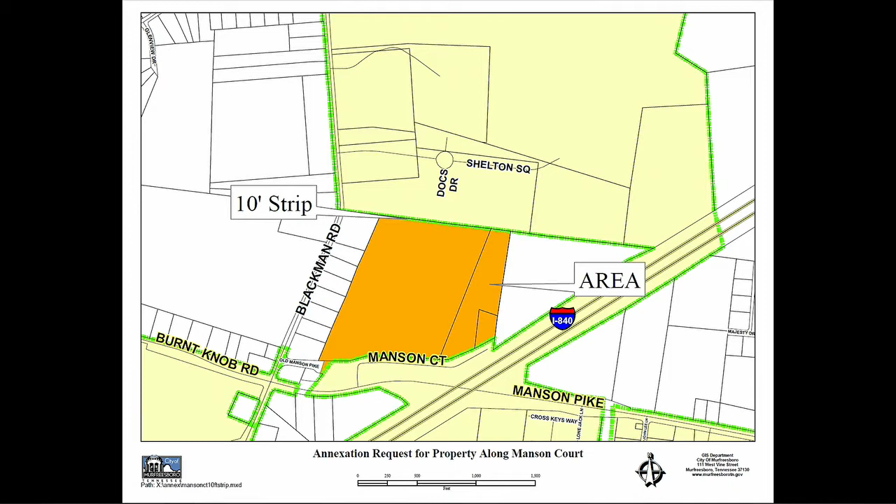So in the past, we have taken a similar approach, and we're proposing with this annexation, if you decide to move forward with it, that you condition it, and it should be written this way in the plan of services, either that the homes need to install fire hydrants per the fire department's location requirements, and make improvements to the driveway, making them wider or a hard dustless surface, and prune the vegetation that has overgrown the drives, or that those houses no longer be inhabited, and if people aren't there, there's nobody to make a call.

And so the way we would do that is we would postpone second reading at City Council until the property transfers from ownership of these three separate individuals to the developer who has a contract to purchase it. After the developer becomes the owner, then they can, of course, get rid of the homes, and then we can proceed with second reading. I reached out to Mr. Taylor and Mr. Mulchin, who represent the developer, and they said that the developer is comfortable with that approach. So I think we can cover our bases either way.

If you have any questions about the plan of services, I'd be glad to answer them for you. Otherwise, you should conduct a public hearing regarding the annexation. After this, I'll give you another presentation regarding the zoning. Okay. Any questions of the staff? Did you say the developer does not have a talk? Yeah, they will with the zoning, but not with the annexation.

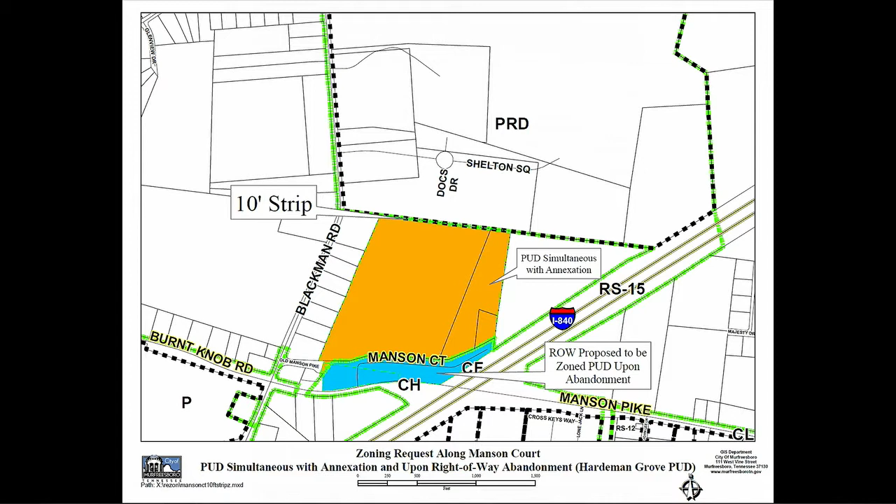They are small lots, with the smallest lot being 5,500 square feet. But the way we're calculating lot size here is on the lot width, so you can see in the plan that there are 3 different lot widths. And the homes are primarily masonry products, either brick, stone, or rock, and of course vinyl is allowed for details. The only exception to the similar type zoning is to the width of the property, and they're proposing to allow a 15-foot setback to the house, but the garage will maintain that 35-foot setback so that you can park 4 cars in the driveway, which is something that's been important to us when considering development plans.

They're also proposing to do a little bit wider of a right-of-way. I did include some information regarding the future land use map, which the Planning Commission has adopted. And you can see the future land use map identifies this area as business park.

And business park is a type of use, because it's a land use map, that would allow like office type development. Sometimes when you think business park, you think industrial developments, but in our land use map, that's not the type of use they're talking about. So they're talking about office parks. So of course, residential use isn't quite consistent with business park, neither is the commercial use, although maybe it's a little bit more, because the commercial use can provide neighborhood uses.

I'm going to invite Mr. Rob Mulchin to the lectern at this time to go through the details of the plan. If you have questions from either of us, we'll be glad to answer them. I did lay a letter out on your desk from somebody who was unable to attend the public hearing, so I told him I'd lay it in your desk. If you have any questions, I'd be glad to answer them.

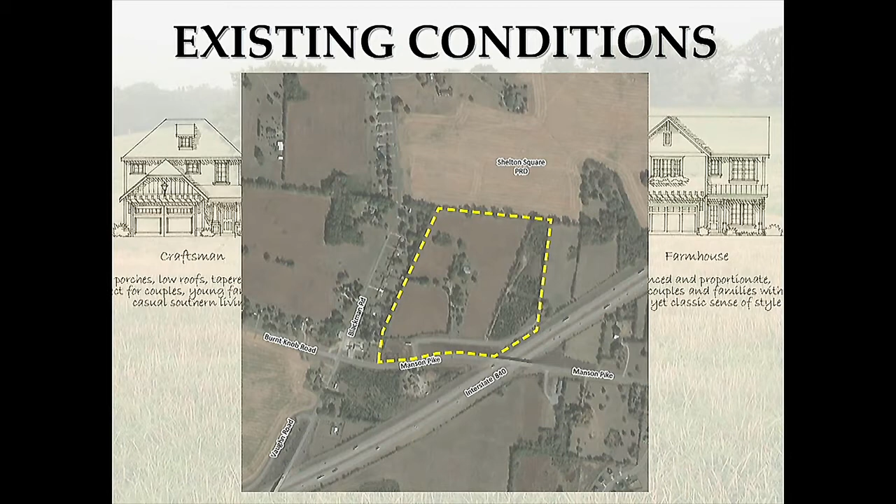Zoning: the property is currently zoned RM, or medium density residential, in the county. As you can see, there are a number of properties to the east and west that are also zoned as county properties at this time. To the north is the PRD, which is part of the Shelton Square project that you approved last year. To the south, you have some neighborhood commercial parcels that are part of the county zoning on that side. So you get some connectivity, and you also have some commercial elements in and around that intersection.

Then off to the southwest, you have the brand new city park that was recently approved a few months back on that side. As Margaret Ann alluded to, for the 2035 land use plan, the current request is for a business park type use. We have deviated from this in regards to the amount of newly proposed residential developments that are in and around this area. We feel it's a much better use in regards to the existing uses that are out there.

And as Margaret Ann alluded to, a portion of this development, roughly about 2.5 acres, is going to be a commercial element along Manson Pike. So we feel that we are kind of supplying a little bit of that business type character and more of a commercial element on that side. So we're kind of giving a dual use with this project.

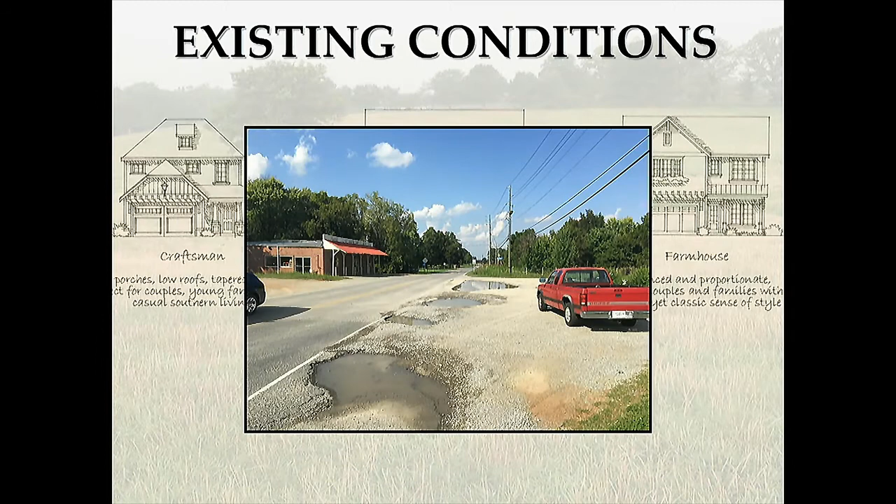This is looking back over towards the overpass going over Interstate 840. Again, this is a view actually looking the other direction back towards Blackman Road. This is the existing Blackman Station. As I had talked about, this is one of the properties that was zoned commercial neighborhood in the county. This is the little gas station service area in the northeast corner of Blackman Road and Manson Pike. And this is looking south along Blackman Road from that intersection as well.

This is one of the existing homes along Blackman Road that backs up to the property. You can see a one-story ranch style home that's indicative of the other properties there along Blackman Road.

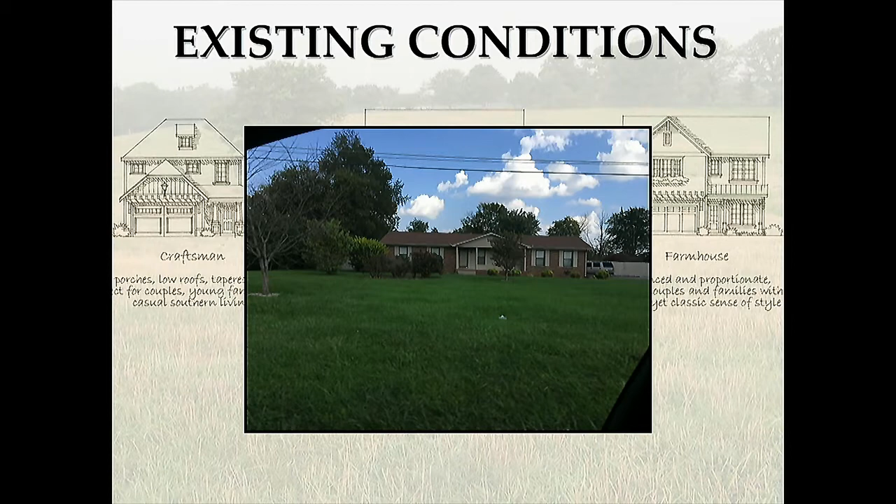We're asking for a planned unit district zoning on this. We're looking at roughly about 40 acres overall. As I said, about 2.5 acres of this overall project is going to be dedicated to commercial, 2 commercial lots at the entrance to the development. I'll talk a little bit about that here in a little bit.

The actual project is going to be all public streets within the development, with sidewalks on both sides, so a very walkable community for the residents, and also connectivity back to the commercial lots and also Manson Pike. And all utilities will be underground.

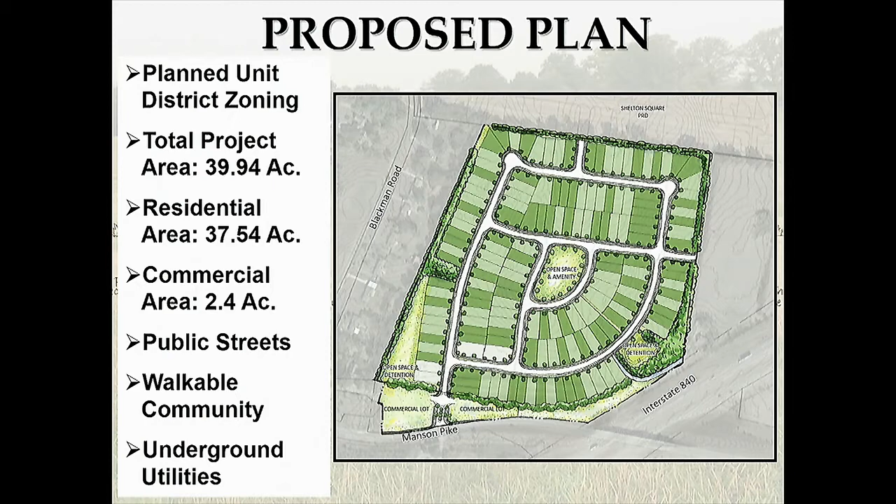Looking at 160 single-family detached dwelling units. So you're looking at roughly about 4.36 dwelling units per acre with this development. We're looking at a little more than 5 acres of open space on this. As Margaret talked about, we'll be looking at 3 different unit styles.

This is a very similar project. Our client, Crescent Homes, brought forward Kingsbury last year. They've now found another property where they want to incorporate this product style, home style and development style.

Looking at a 41-foot minimum width lot. You have a 46-foot wide and a 51-foot wide lot on those. So the minimum lot size in that 41 is roughly about 5,500 square feet. And we'll also have a neighborhood HOA to go along with that.

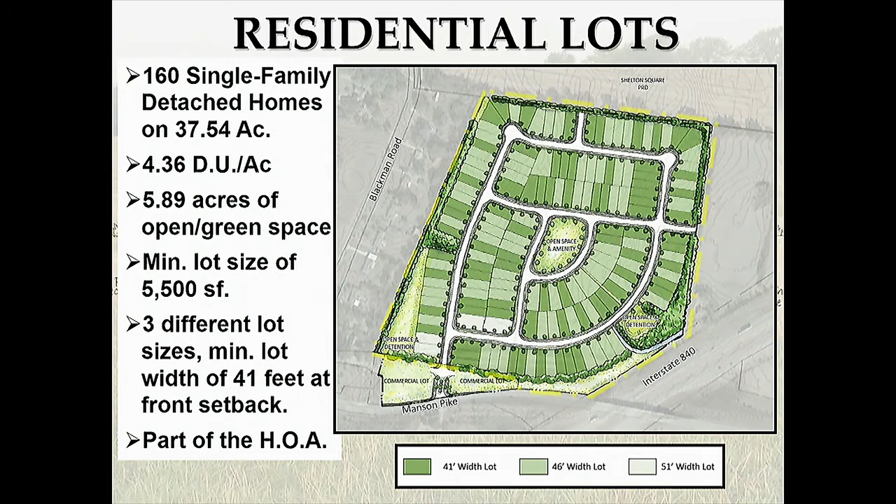Setbacks, as Margaret Ann talked about, on the homes themselves: the actual front of the home can be 15 foot off the right-of-way, but the garage will be recessed 35 feet so we can get our typical 4 parking spaces between the back sidewalk and the garage, with our typical 5-foot sides, which gives 10-foot separation between structures.

And then on the rear of the lots, you got 2 different setbacks. On the corner lot, you got your typical 5-foot side setback, which is actually more your rear setback, and then a 20-foot rear setback on the internal lots.

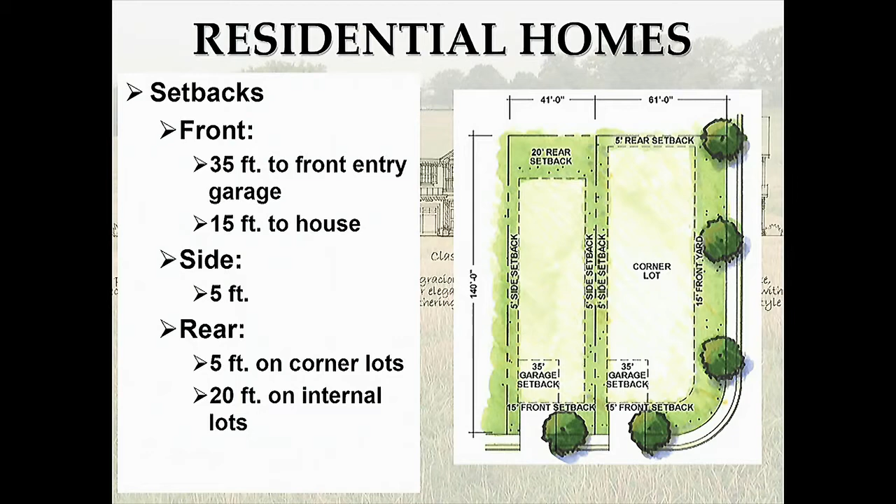Residential homes will be 1- and 2-story buildings. Looking at minimum 1,600 square feet living space on the homes themselves. 2-bedroom minimums, so it's more like a 2- or 3-bedroom type style. 2-car front entry garage with decorative garage doors.

And we're going to talk a little about building materials. All the elevations will be a masonry type product, whether it be cement board, brick, or stone, with vinyl only permitted in the trim, soffit and fascia areas. And these homes will have a covered porch or stoop to enhance the overall streetscape character of the neighborhood.

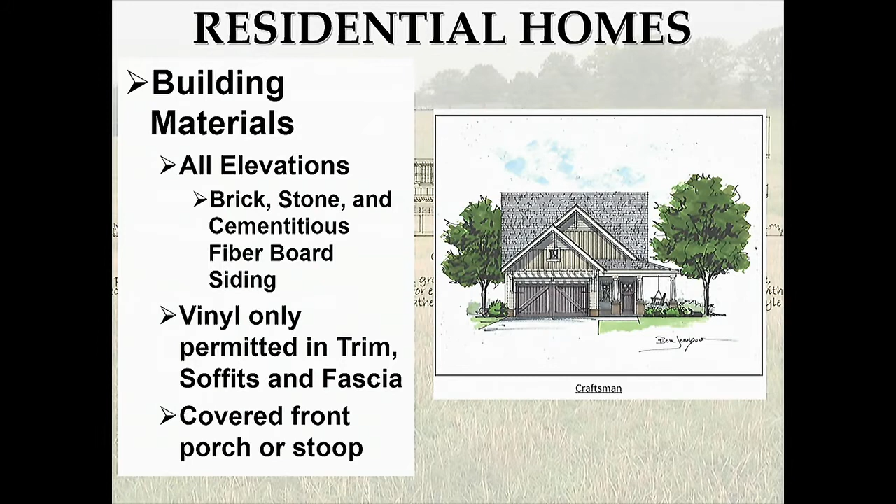There's a couple of representations of the actual home styles, caricatures of what they anticipate the homes look like. Very good street presence in regards to the architecture. A lot of care has been put into this design, this neighborhood overall. With this project, they looked at a number of different elements in regards to the architectural styles and what types of homes they'll be around.

We looked at the corner multiple frontage lots; if you're on the corner lot, making certain that you dress up both facade elements in regards to the streetscape. Also looking at terminating view homes that are at the ends of roadways or ends of vistas, in regards to visibility when you're looking down a street.

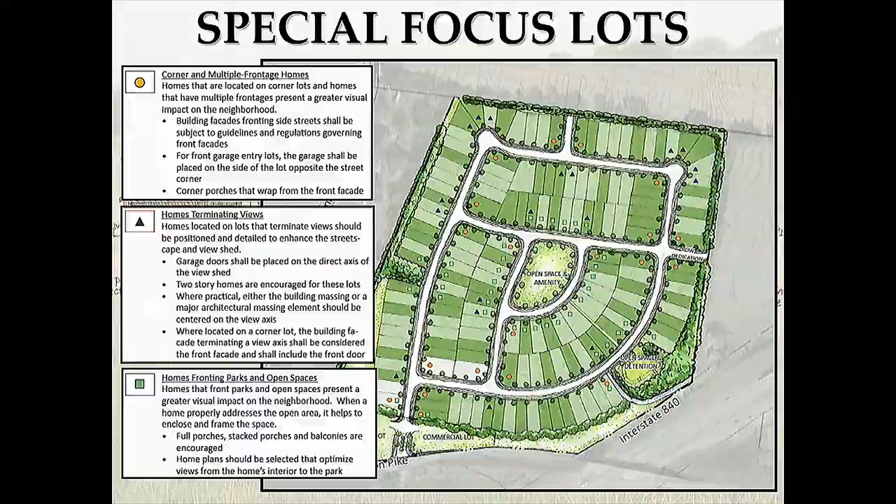Then also homes that front onto open spaces and parks. They've taken a lot of account in regards to the design of these homes. A general perspective, caricature of what we envision the streetscape to look like.

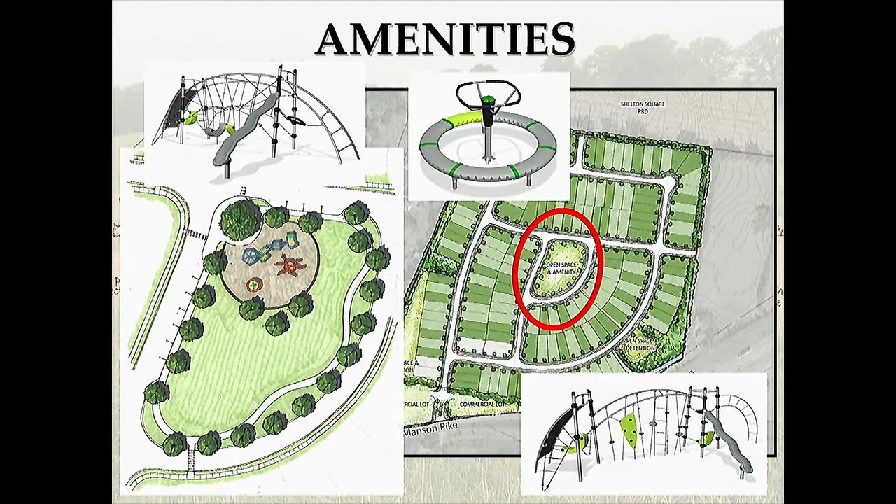We're also incorporating a playground structure. As you can see, these are some of the structures. Looking at using Kompan, a very up-and-coming residential equipment maker for outdoor spaces. So we're utilizing those equipment components for residential recreational space.

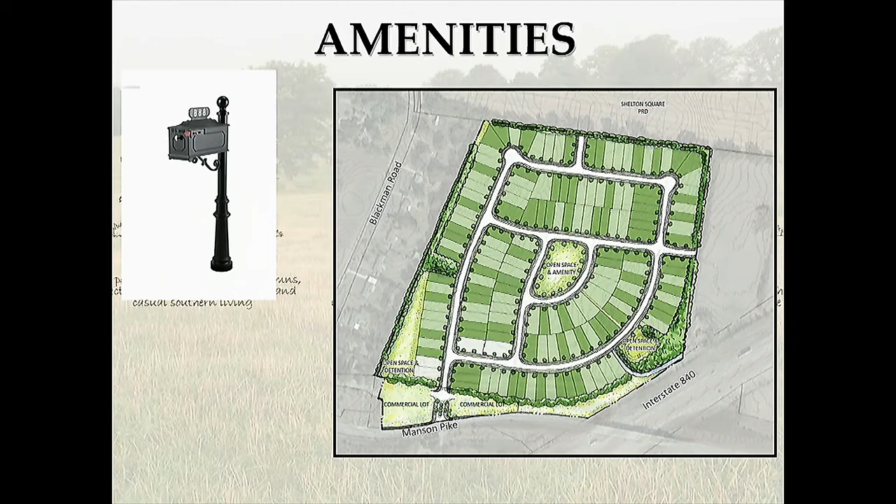Looking at decorative mailboxes to help keep the overall community character intact, and also decorative street lighting along the streets.

Now we're going to talk about the 2 commercial lots. As I alluded to, there's 2 commercial lots along Manson Pike as you enter into the development. So more or less, these will be more like a neighborhood type commercial use. We don't have any immediate users dedicated at this point in time. We're just going ahead and getting the zoning out and getting the opportunity for our clients to go out and market these 2 commercial lots to potential clients.

But we are modeling the uses on the commercial fringe type zoning. So we've gone through, as you can see in your book, we have a list of uses in there that we feel are appropriate uses for these small lots. Definitely more neighborhood style uses. And we'll also be looking at the actual commercial structures with a building height no greater than 35 feet.

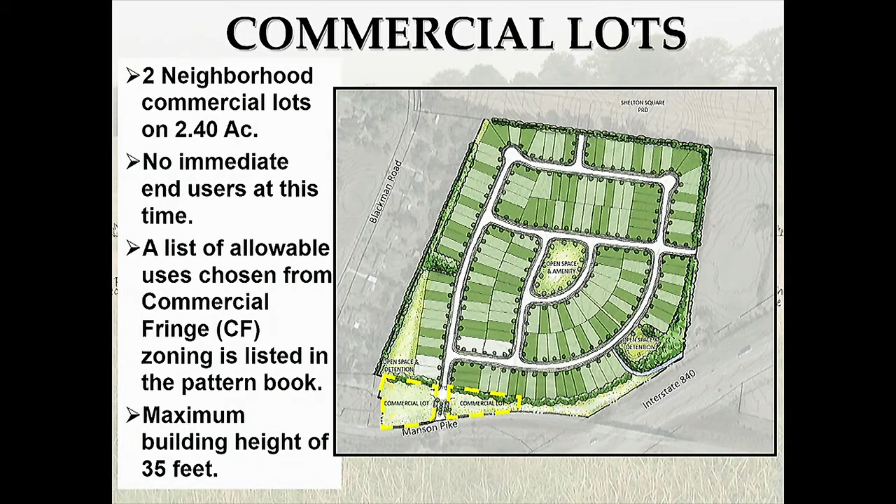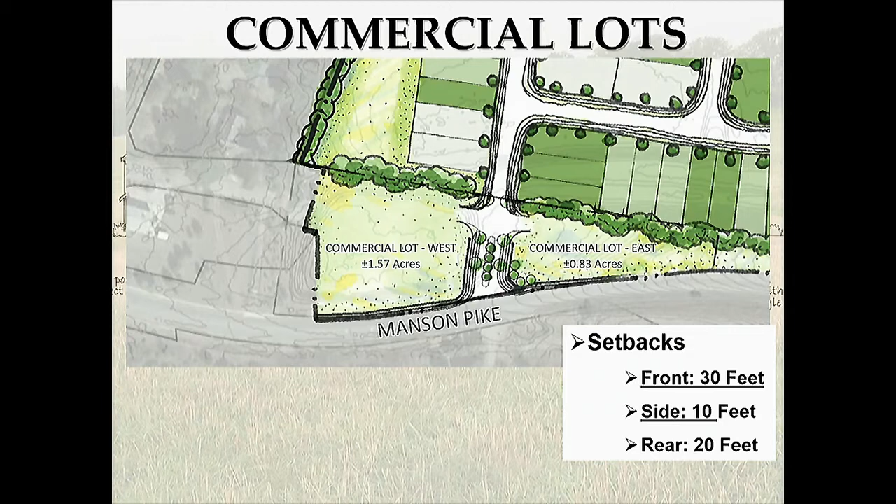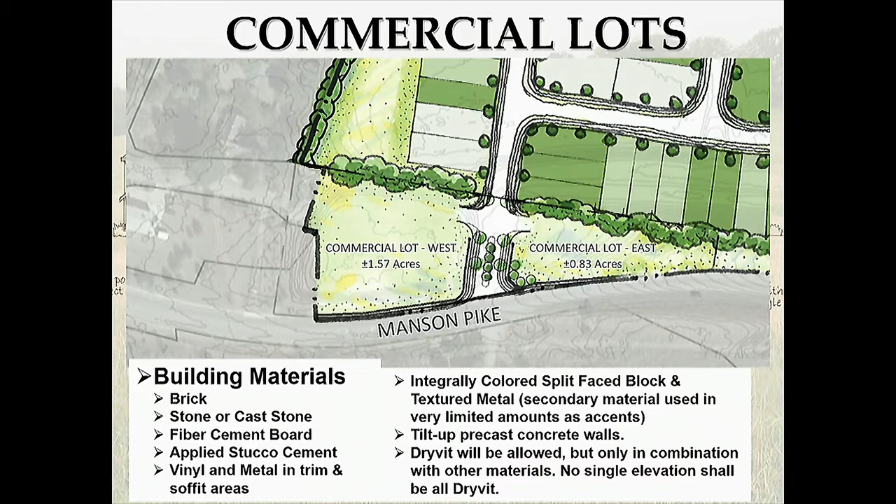We're looking at 30-foot front setbacks, 10-foot side setbacks, and 20-foot rear setbacks in regards to the commercial structures to the roadways and the neighboring adjacent properties. As we talked about, building materials are another important character to this. We're looking at primarily masonry. We do have a couple secondary materials like textured metal or split face block, which will be used in very limited quantities in regards to architectural elements on the buildings themselves.

We'll also be incorporating a residential buffer between these two commercial lots and the edge of the residential neighborhood itself. We're looking at utilizing a type C landscape buffer, but we'll be enhancing that with a 6-foot tall PVC fence for any headlights or anything like that in the parking lots associated with these commercial lots, to help mitigate that issue in regards to the homes that are directly next door to these commercial lots.

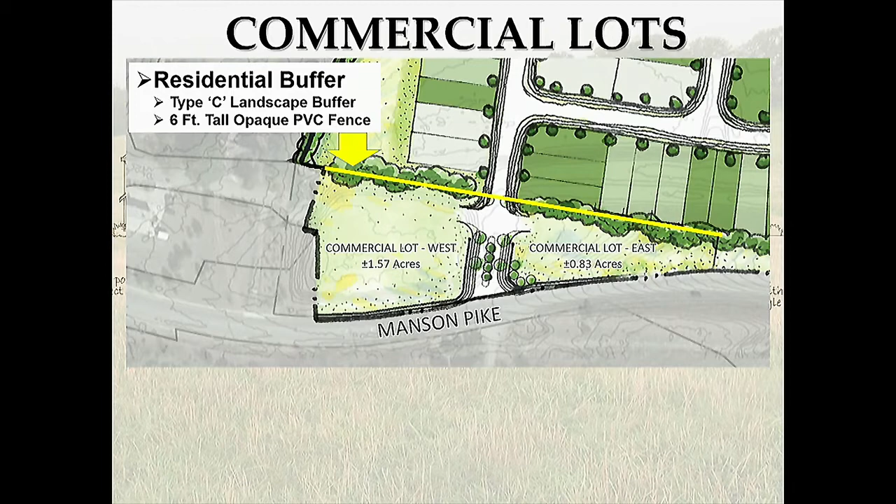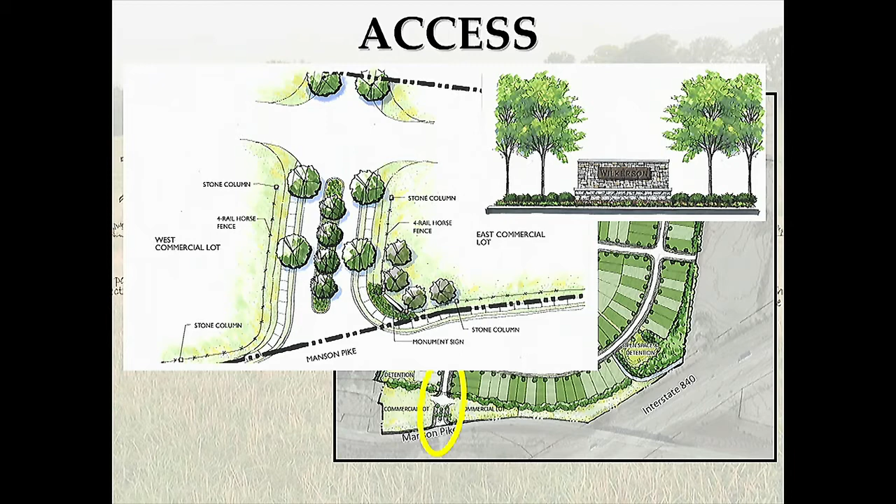Our secondary point of ingress egress will be a stub street that will tie into the overall Shelton Square PRD. So as that section is developed out, we'll have another secondary access point into the community. We also have a stub street that we're providing for the remnant parcel that Margaret Ann talked about in regards to the annexation. So when that property does ever potentially fill out in the future, they do have an access point to a city street.

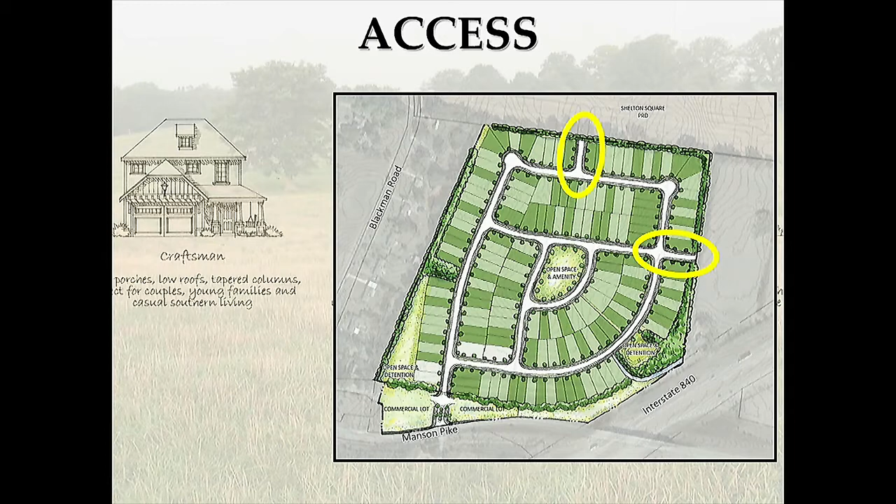With that, I'd like to be here for any questions or comments now or after the public hearing. Appreciate your time. Thank you.

Mr. Chairman. Yes, ma'am. Mr. Mulchan, on the drawings that you have for us in the book on page 15, just samples of the styles of the homes, would any of those be homes that would be on the 41-foot lots? Like the bottom left corner, would that be a 41-foot lot? It could potentially be, but these weren't drawn in regards to, I don't have the reference as to what size lot these would go on. It's more about the character and style of the homes that we want to portray on those lots.

That one there by itself, just based on the fact that you're going to have a 16-foot garage and then roughly another 10-foot space, it's potentially a home that could be on a 41-foot wide lot. I was just trying to figure out whether it was just the garage. I guess most of them will end up being extended in front, and the front doors will be set back. Yes, ma'am. Some of the homes will have that character, but the setbacks we're asking for here allow the designers, on a lot by lot basis, the opportunity to bring the home out in front of the garage, so the garage isn't the main focal feature of the architecture.

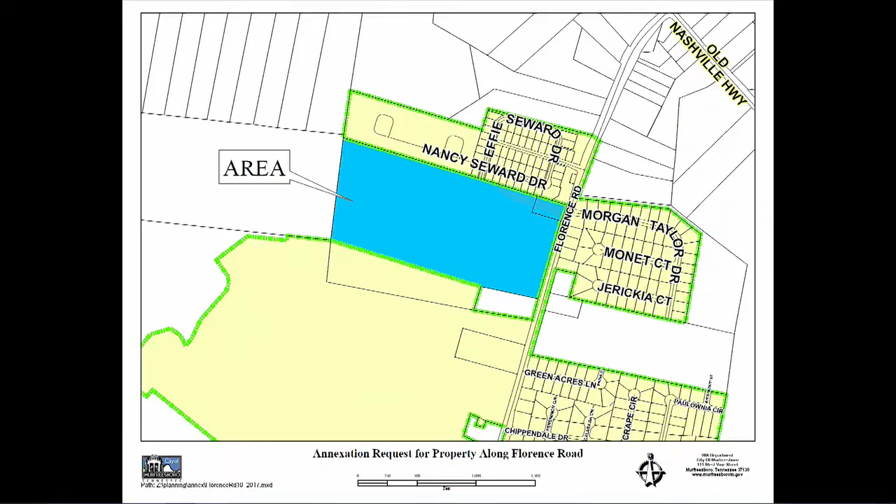This is for one entire parcel of just under 1 acre, and then a 36.3 acre portion of a larger 44 acre parcel. The remainder of that larger parcel was annexed into the city about a decade ago as part of the Home Place subdivision. The property is contiguous with the city on the north, south, and east. We would have to include a 10-foot strip along the eastern and northern boundaries of the annexation area in order to prevent the property in white on the south from being completely enclosed by the city limits.

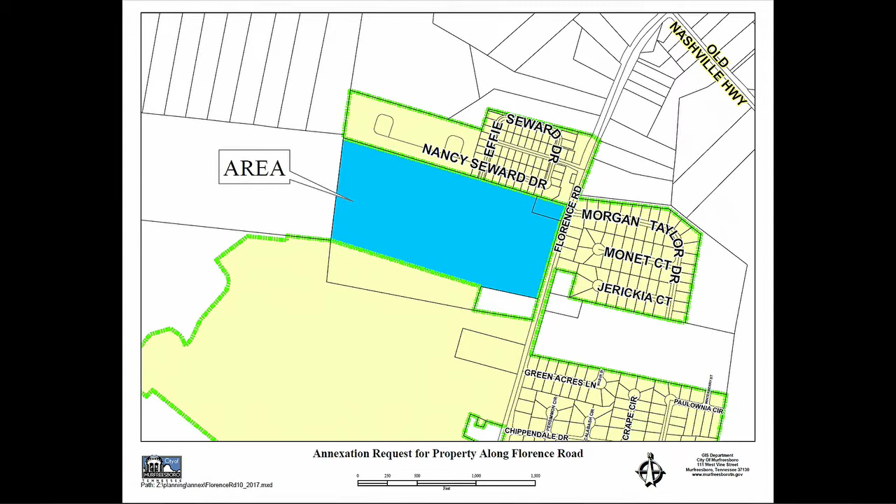The plan of services indicates that the city can provide services upon annexation. A companion rezoning request will be the next item on the agenda. Staff can answer any questions that you may have. You should hold a public hearing and then formulate a recommendation for the city council. Thank you. Okay. Any questions? This is for the annexation plan of services and annexation petition. I'll open the public hearing at this time. Ask anybody to come forward. Okay. Seeing no one come forward, I'll close.

Oh, excuse me. Almost missed the bus.

My name is Tom Murray. I live at 3708 Florence Road, which is right across the street from this. And I don't know if this is the proper hearing to talk about it. Don't put all those people in here. There's nothing like getting up in the morning, sitting on your porch and looking across and seeing the deer. I mean, it's rural, but yet it's not. There's subdivisions on this side of us, subdivisions on that side of us. And I just pray you guys don't do it. I don't know what else to say. That's about it. Thank you.

Thank you, sir. Anybody else? Okay, I'll close the public hearing. Any questions from the Planning Commission? If not, we're ready for a motion. I'll make a motion we approve the annexation and the plan of services. I'll second. All in favor say aye. Aye. All opposed? Motion carries. Move on to item D, a zoning application for approximately 44.34 acres located along Florence Road

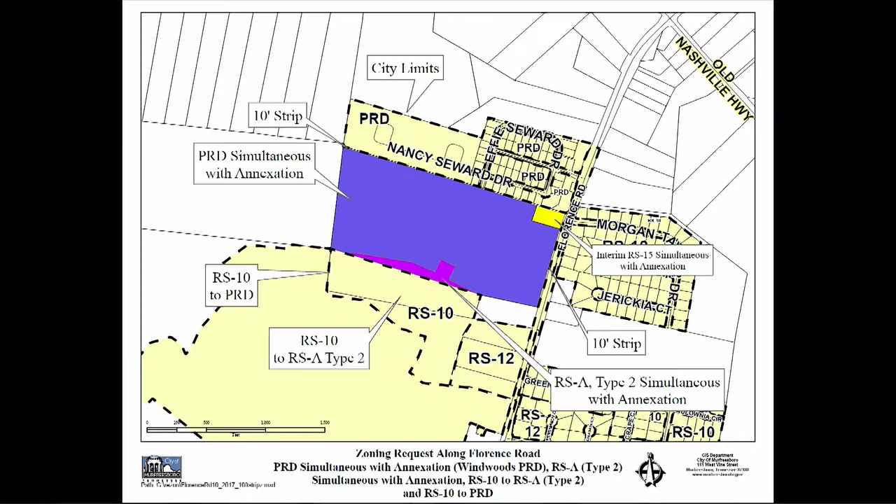to be zoned PRD, which is 35.55 acres, and RSA Type 2, 8.79 acres, simultaneous with annexation. Windwoods PRD is the development. Fortress Builders Incorporated is the applicant. Mr. Anthony. Thank you, sir. Fortress Builders has requested rezoning for 44.34 acres located along the west side of Florence Road. On the map, the colors aren't quite matching what I had in my head, so we'll try to walk through it. The portions colored purple and blue, the applicant has requested rezoning. That's about 35.5 acres, rezoning to PRD. The proposed PRD would permit 107 single-family residences.

Going back to the map, let's see. I do apologize, as this map is a little confusing. It's confusing to me, and I've looked at it 100 times. On the southern portion, you will see property that is proposed to be rezoned RSA Type 2. This is our suburban townhome zoning. It's a relatively new zoning that was just approved by the City Council earlier this year. That's a little under 9 acres of the property. And then you will see one more property in yellow. This is just under an acre. There's an existing house here. There is no rezoning proposed for that particular portion of this property. So that would default to RS15 upon annexation.

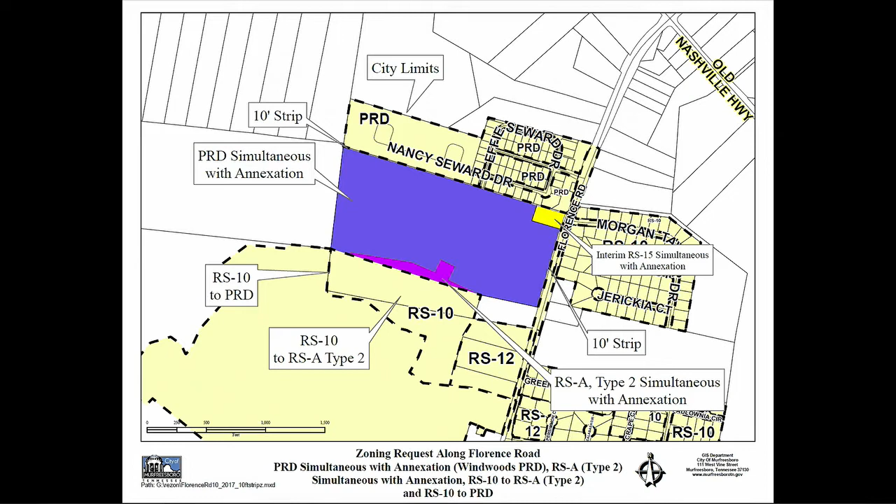Murfreesboro 2035 indicates that auto-urban residential with a density of 3.54 to 8.64 units per acre is appropriate for this area. The maximum density, as we calculated it, that could be achieved with this rezoning is about 6.68 units per acre, which does fall within Murfreesboro 2035's recommended limits.

Rob Mulchan from SEC is here representing the applicant and can talk more about the PRD portion of the rezoning request. Staff can answer any questions that you may have. We would ask that you hold a public hearing and then make a recommendation to the City Council. Thank you. Okay, Mr. Mulchan.

Good evening. Didn't go far enough.

Good evening, Chair and members of the Planning Commission, Rob Mulchan, SEC. I'm here tonight on behalf of Fortress Builders to present to you Windwoods. Here's an aerial of the existing property today.

As you can see, a vast majority of this property is actually farmland, agricultural land that's used for cultivation of hay, and also there's a larger portion in the northwest corner that is a very densely wooded portion of the property on that side. The property is actually along the western side of Florence Road, as you can see in the aerial there itself.

As Don alluded to, we do have a congregation of different types of zonings going on with this property. The majority of the property is currently zoned RM, medium density residential within the county. To the southern portion of this property, there's a portion that's RS10. As you can see, the adjacent properties to the south, you see the large PUD area. That's part of the Home Place PUD that was approved many years ago.

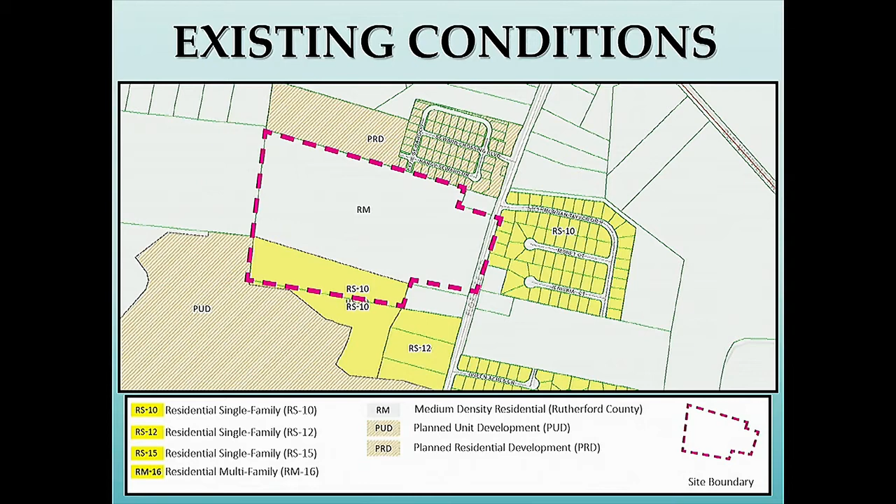And then you've also got the PRD for Seward Crossing to the north of the project, and then a couple RS10, RS12 residential subdivisions to the east of Florence Road. The 2035 plan calls for an auto-urban type of use. As Donald talked about, our uses and our density for the project itself are in line with this type of use, so we are staying with the land use as planned by the 2035 plan.

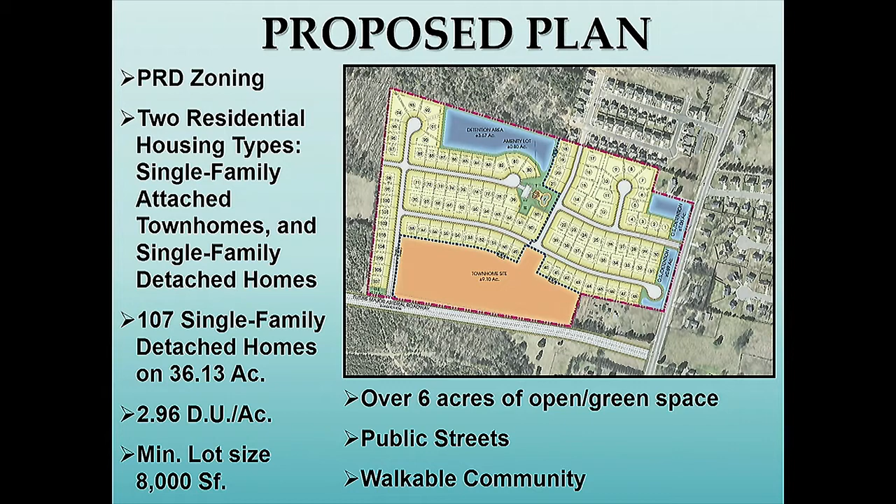We're also looking at incorporating over 6 acres of open space, whether that be active, usable open space with the main amenity complex or detention areas located along the property to handle our stormwater management facilities. These will all be public streets with sidewalks on both sides, creating a very walkable community and also connectivity back to the main amenity feature I'll talk about in a little while.

We have 2 different types of setbacks in this development, because we have 2 different types of housing styles. We'll have a front entry garage style and also a side entry garage style. So I want to give you a little description of the different styles and setbacks that we've got going with these types of homes.

Front setback, front entry garages, we'll be looking at 35 feet from the back of sidewalk to the face of the garage, with the secondary front or side facing garage entrance off a side street being 25 foot, so that incorporates allowing parking on that as well. Doing about 5 foot on the side setbacks to 10 foot between units, and we're asking for 15 foot on the rear.

On the side entry garages, we're looking at those being reduced to a 25 foot front garage. That way the homes are coming into a side loaded garage, so the home and the garage element will be up as close as 25 foot, but there will be no doors facing the roadway. So that's the difference: on the front entry you'll have garage doors facing the roadway, whereas these side entry garages will be facing the actual units next door on that side.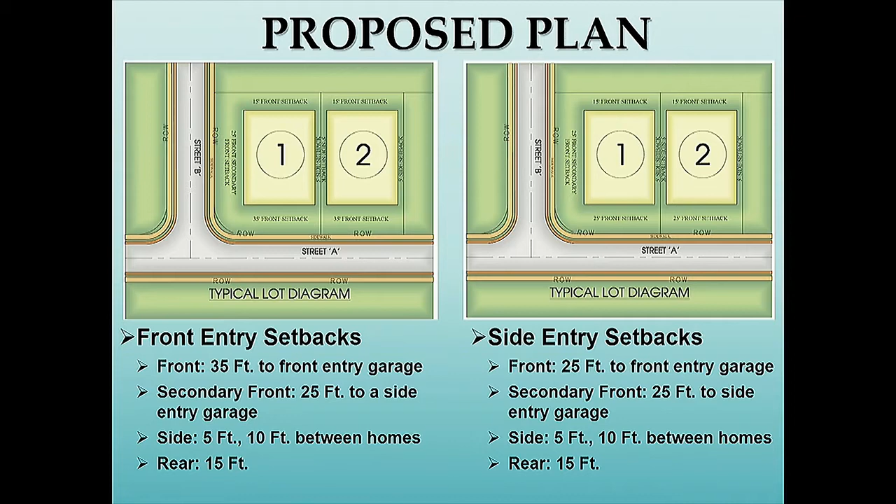So we're asking for 25 foot to bring that architecture up. The secondary front will be 25 as well, and then we're looking at 10 foot between structures or 5 foot on either side with a 15 foot rear. The single family detached homes, 2 stories in nature, minimum 1,500 square foot living space, 2 bedrooms or more. The homes will have 2-car front and or side garage loaded units, and then we'll have an enhanced standard garage door to add to the character of the neighborhood.

These are some of the examples of the homes that Fortress Builders has built in the past, and we'll be utilizing these types of materials and looks on the homes for this development as well. All elevations will be comprised of 50% masonry materials, hardy board, brick, or stone, with the remaining portion being 50% vinyl. We'll also be utilizing vinyl, of course, in the trim, soffit, and dormer areas of the homes.

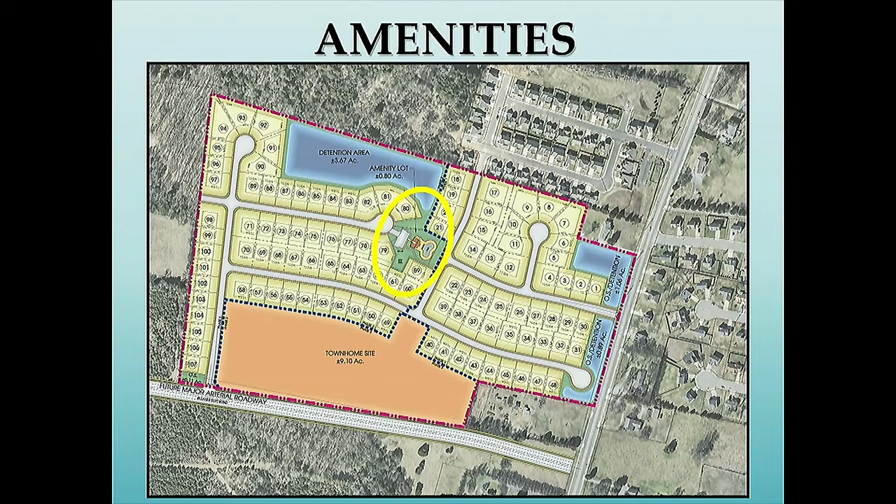Amenities, we have one main amenity complex ideally located at the central portion of the development. Again, utilizing the sidewalks along both sides of the streets will allow all the residents to get to and from the amenity center. As you can see in this tighter view, we're looking at a pool cabana with the pool included, and then also a tot lot and an open lawn area for open play on this property.

Access. We have one main entrance currently off of Florence Road, in the middle of the development. We'll incorporate a 3-lane cross-section at that entrance for a dedicated left and right out of the development and 1 lane in. We're also looking at, in the future, working with staff in regards to the future major arterial roadway connection between Florence Road back out to I-840 and the future interchange that should be coming in the next 10 years or so, whatever time frame staff can work out with TDOT in regards to getting that overpass and the interchange.

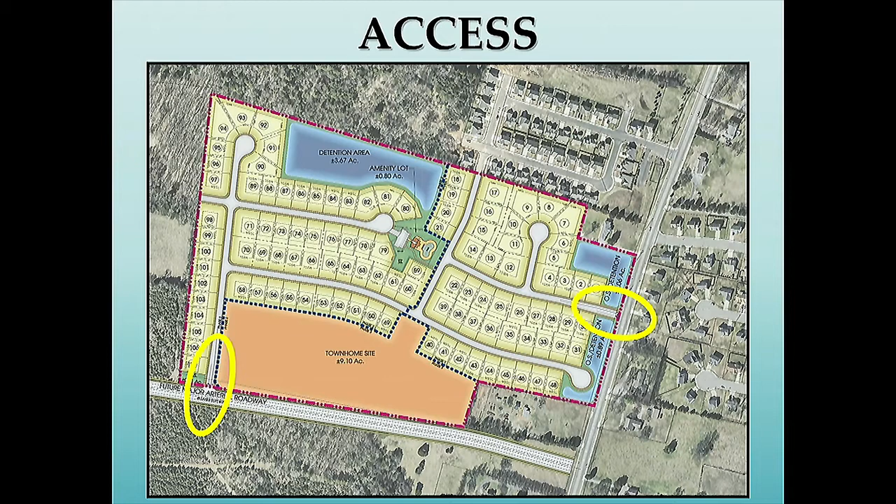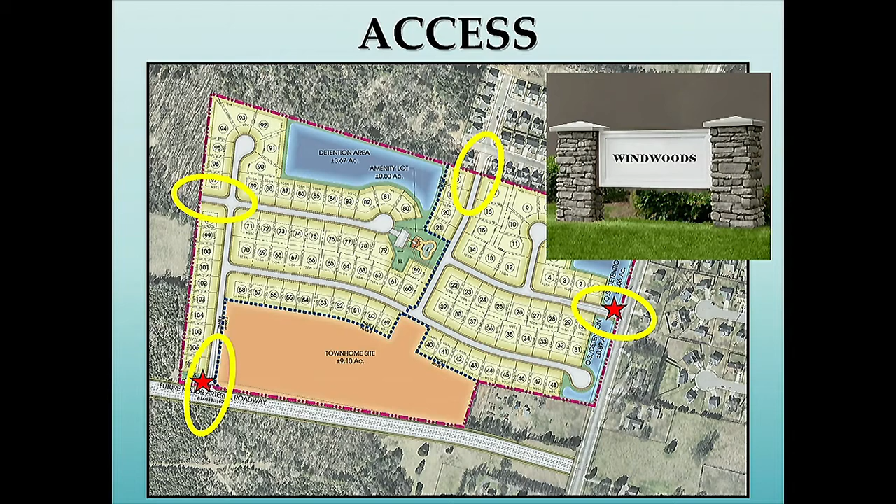So that's one of our secondary. And more immediately, we'll be incorporating monument signage at both of those entrances as they progress. Our secondary entrance for the short-term future will be our connection to the north to Seward Crossing to allow us a secondary access point back out to Florence Road. We'll also be providing a stub off to the west. That will allow us connectivity to the adjacent properties as they develop out in the future.

Thank you for your time and consideration of this. I'm available for any questions now or after the public hearing.

Any questions, Mr. Molchan? Yes, sir. So, Rob, I'm just going to get my mind around the 25-foot setback with respect to the side entry garages. I guess the thought process is we're still accomplishing the same amount of stacking space for cars. Because it's a side entry garage, you're still going to be able to stack two cars, front to back and side to side, because your driveway's longer. Is that the thought process?

So you'll have 25 foot up to the actual face of the garage or the house structure. Right. And then from there you have the actual court where you maneuver your cars in and out. We're not regulating the garages as being solely for cars only, so we're allowing that extra 2 spaces where you would typically pull up in front of the side entry garage. Okay. So you're still getting the 4 spaces as if it were a front entry as well.

Okay. Any other questions? Yes, sir. Mr. Molchan, on page 5, you showed the major thoroughfare plan with the road going to the north of the property. I don't think that's correct because there's houses on the north side of the property. And every other drawing that I see in your book has the major thoroughfare plan showing the roadway on the south side of the property.

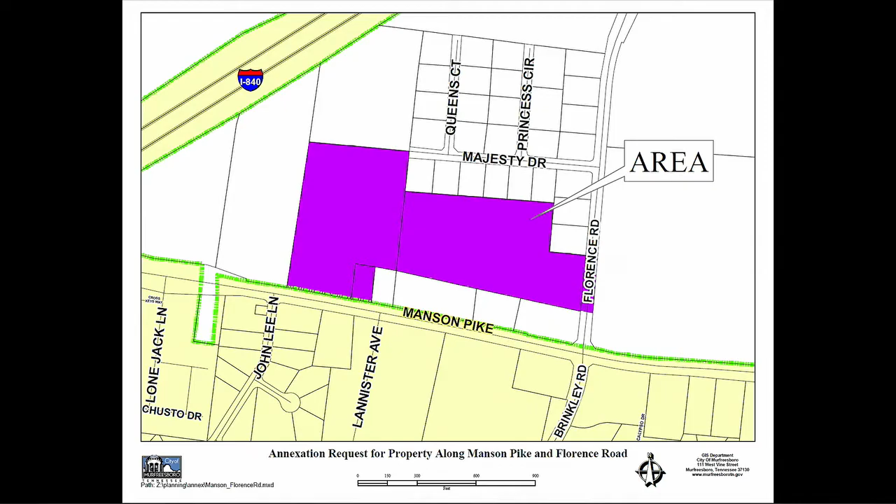Okay. This public hearing will be for the annexation and plan of services only. So I'll open the public hearing. Ask anybody come forward that'd like to speak.

Seeing no one come forward, I'll close the public hearing. I think we had a call-in comment.

That's my wife I just left.

Any questions or comments by the Planning Commission? Now we're ready for a motion. Chairman, I move to approve annexation plan of services. Second. Motion is made and seconded. All in favor say aye. Aye. All opposed. Motion carries.

Now the zoning application for approximately 18.2 acres located along Manson Pike and Florence Road to be zoned PRD, known as Blackman Village PRD, simultaneous with annexation. Old South Properties is the applicant. Mr. Anthony. Thank you, sir. This rezoning request is for the same property as the previous item.

Old South Properties has requested that the city rezone 18.17 acres located along Manson Pike and Florence Road to PRD, or Planned Residential District, simultaneous with the annexation. The proposed PRD would include a 79-unit single-family residential development that would give a density of about 4.35 dwelling units per acre. Surrounding zoning includes RS12 and RS15 on the southwest, and county RM or medium-density residential on all other sides.

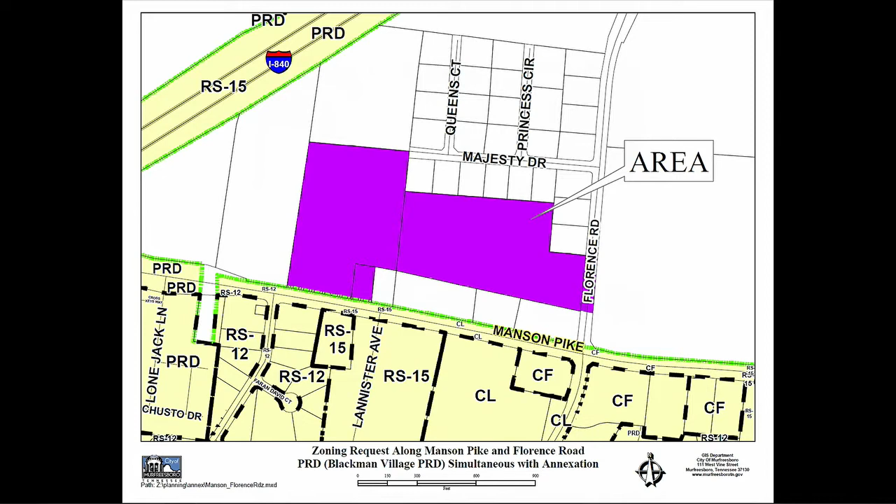In staff's view, and we discussed this at our workshop a couple of weeks ago, the West Park annexation and rezoning has altered how we think about this corridor and its future, and residential use may be a more realistic long-range goal for this area than business park in the future. The Planning Commission will need to conduct a public hearing and make a recommendation to the City Council. Rob Molchan from SEC is here and can discuss the request in more detail, and staff can answer any questions you may have.

Commissioner Lamb, members of Planning Commission, Rob Molchan, SEC. I'm here tonight on behalf of Mr. John Floyd to present to you Blackman Village. As Don alluded to, the property is located between Florence Road and Manson Pike, just to the north of the intersection of Manson Pike and Florence Road. As you can see here in the aerial, the majority of these properties is actually all agricultural. There is a house that is on the Florence Road side of the property.

We'll be maintaining that house as part of the overall development, and I'll talk a little bit about it here in the future. But the rest of the property is mainly just open grassland, with some really good, nice tree rows along the periphery, and we'll talk about our plans to keep those as well.

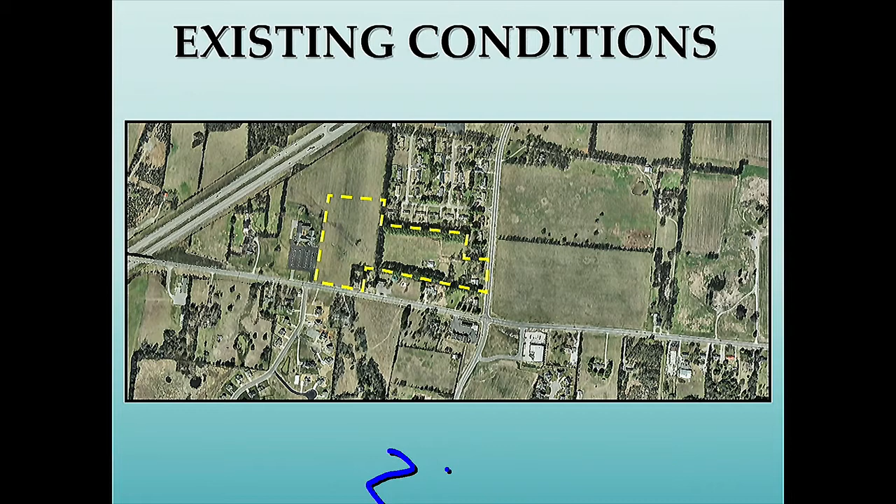Zoning-wise, as you can see in the zoning map, we're currently RM in the county, so medium-density residential. To the south is primarily different zoning classifications within the city itself. Namely, you got some RS15, you got some commercial as well at the intersection of Florence and Manson. There you have the little gas station right now on the southwest corner of Florence and Manson, along with Dollar General just down to the east of the intersection on that side.

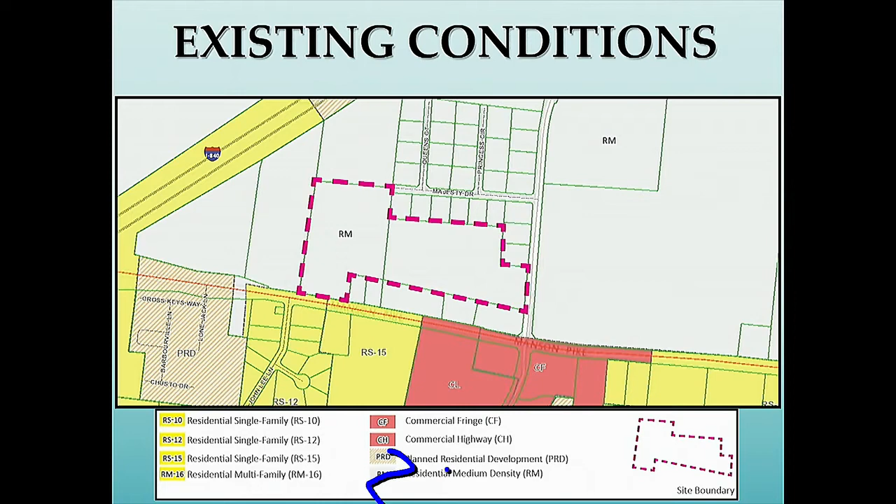As Donald talked about, in regards to the 2035 land use plan, this property has been classified for business park. We've evaluated this in regards to the uses that were outlined in the 2035 plan. We feel that our deviation from this plan is in regards to the residential character and institution of the church next door, that this residential component would be a much better fit in tying into the existing residential to the north and also to the south, and also being a better use in regards to the church next door.

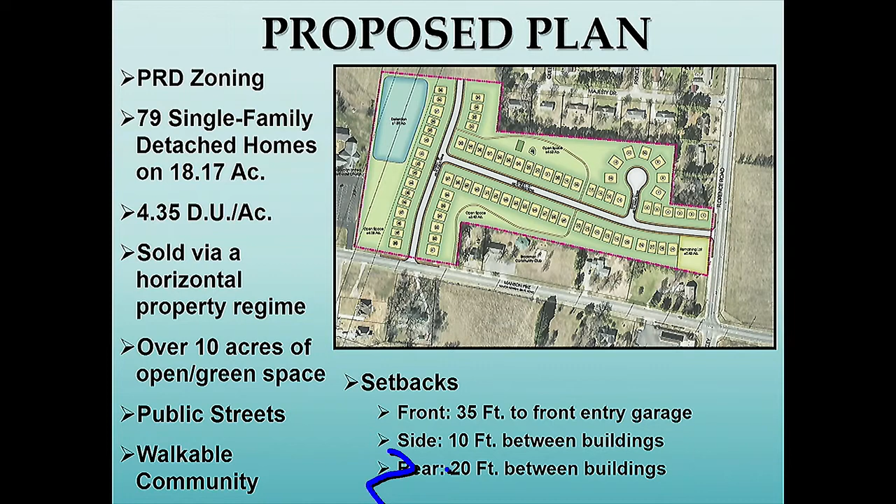With the amount of space we have between the property lines and the way the grades fall on this property, we're planning on keeping all those tree rows as part of our development package to keep that character, encapsulate this development, and give it some edge feature character in regards to a green edge, and also to maintain our neighborly relationship with the subdivision to the north and the neighbors to the south.

The homes themselves will be one- to two-story homes, with a minimum 1,300 square feet of living space per home, two bedrooms or more. All homes will have a two-car front entry garage. And again, it's sold under a horizontal property regime. We'll have standard garage doors and windows as the garage elements to these homes.

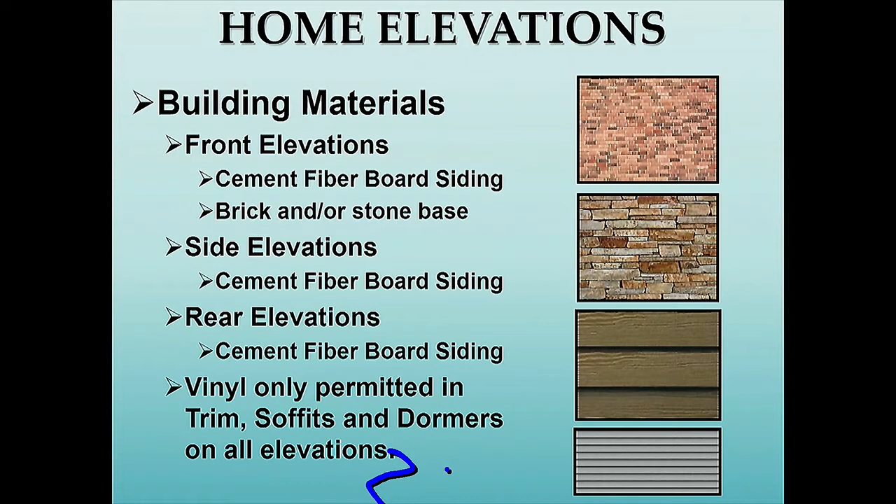Talking about building materials themselves, the front elevations will be cement fiber board with a brick and/or stone base or water table element on the front for accentuation of the front of the homes. The sides and rears will be solely cementitious fiber board. Vinyl will only be permitted in the trim, soffit and dormer areas of the homes on all elevations.

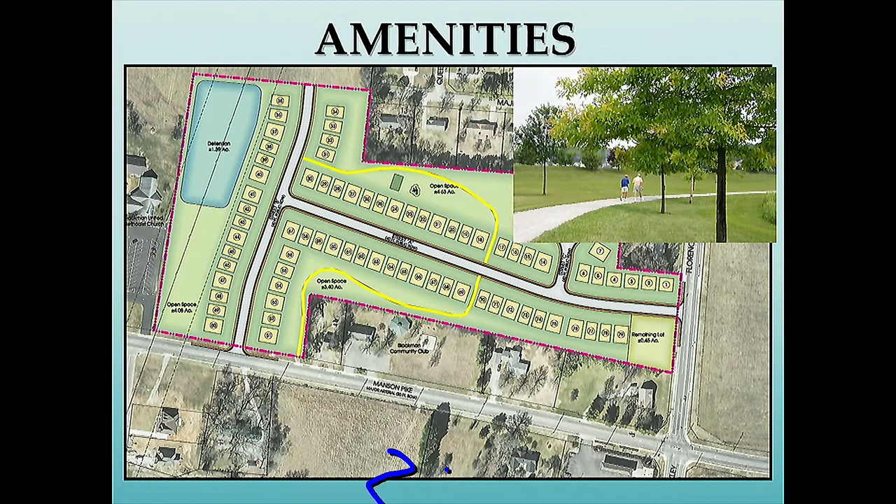Amenities. We've got an overall amenity of a walking trail that'll wander through the open spaces behind the homes and allow the residents to connect back to the public sidewalks on Manson Pike, but also back to the sidewalks within the neighborhood. We're also looking at incorporating a dog park and a tot lot in the northern portion of the open space behind the homes.

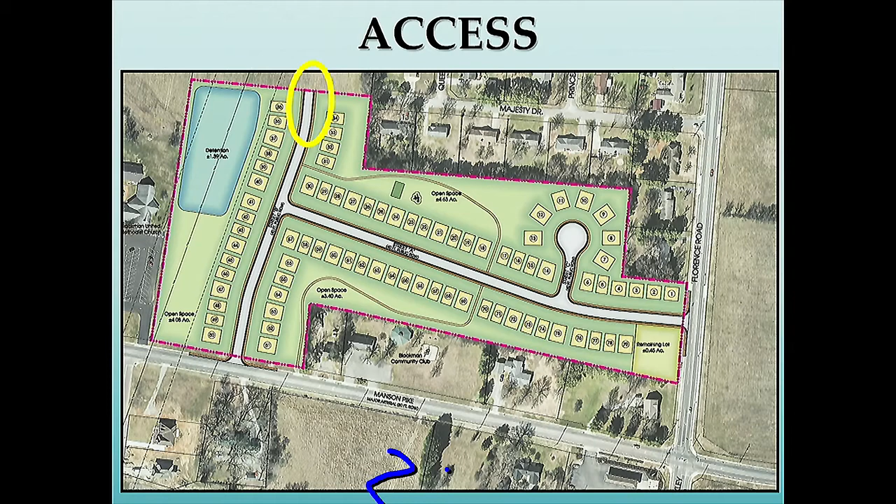Access. We have two main access points, one off of Manson Pike and the other off of Florence. We'll be incorporating a connectivity stub to the north for the adjacent property, so he has connection back into Manson Pike and Florence Road whenever that property develops. We'll also be incorporating a stone or masonry type sign at the two entrances of the development off of Manson Pike and Florence Road.

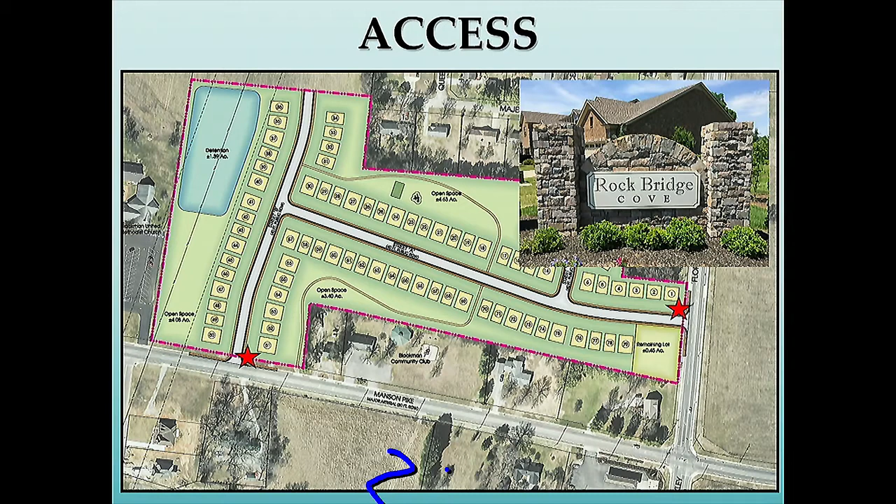I appreciate your time and consideration of this project. I'm here for questions now at public hearing. Thank you. Thank you, Mr. Molchan. Any questions from the Planning Commission for Mr. Molchan? Thank you, sir. In that case, I'll open the public hearing. I ask anybody to come forward that would like to speak.

Hello, my name is Sai Sanpansiri. My property is located right behind that project, 6 acres of land. And I wonder if the street is going through from the Manson Pike to our property or not. I mean, I don't mind to leave it open, but I just want to know what the plan is for that street. Thank you. Okay. He may have to get with you after the meeting and go over that with you, sir. Okay. Thank you, sir.

Hello. My name is Nate Spencer. I live at 2808 Queens Court. I'd like to just thank you all for being out here tonight and away from your families to take care of this. I had a couple concerns about this development.

The first one, I didn't get the information on the original plan for this. I believe it was around 49 original homes, and then they had said they had to come back to y'all and redesign it, and now it's approximately 80 homes in that area. I was curious why it went from 49, 50 homes all the way up to 79, 80.

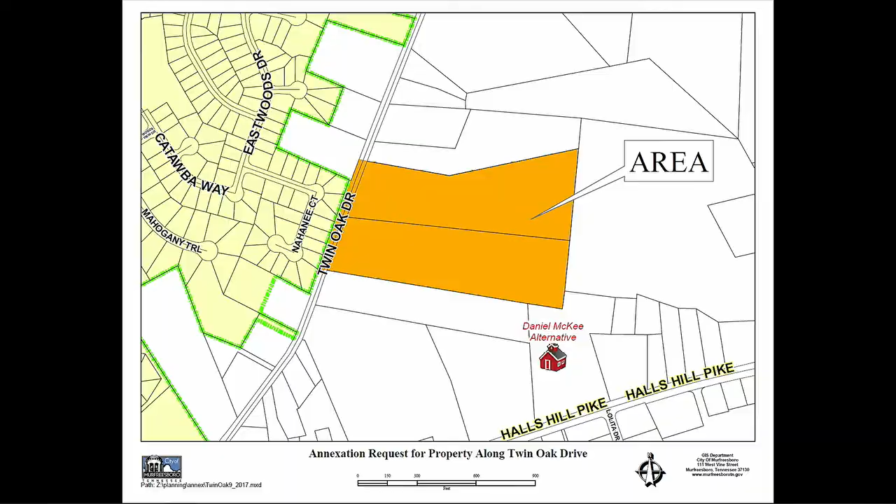The plan of services, which we've included in your packet, does have one important caveat, and that is that the applicant is going to need to obtain a number of easements from neighboring property owners in order to extend sewer to this site. And at this time, those easements have not been secured. Because we went ahead and advertised a public hearing, not knowing how the plan of services would go, we would ask that you conduct the public hearing tonight, but not take action on this request, and instead defer until such time that those easements have been secured. There's a companion rezoning request for this property, and it will be the next item on the agenda. Staff can answer any questions that you may have. Okay. Any questions on the annexation plan of services?

Well, do we know how they're going to get access to the services? Which way? Basically, since we had already advertised the public hearing, that's the reason we're going to have to follow through, but we want them to come back with those. There's no assurance that they can actually obtain those. That's why we're wanting you not to take action tonight until they come back and prove to us that they can get those. Naturally, it's up to them to obtain those easements from the adjacent property owners.

Normally, if this hadn't been already advertised, the applicant would have withdrawn his application, but since it was, it's unfair to the public, if they show up, to not be able to speak at the public hearing since it was advertised. Okay. And they had originally hoped they could have those easements before this, but unfortunately they don't.

Okay, well, if there's no other questions, we'll go ahead and open the public hearing for this matter. Ask anybody to come forward that'd like to speak. Nobody? Okay, I'll close the public hearing. So you want a deferral on this? Yes, sir. Okay. So moved. Second. All in favor say aye. Aye. All opposed. Motion carries.

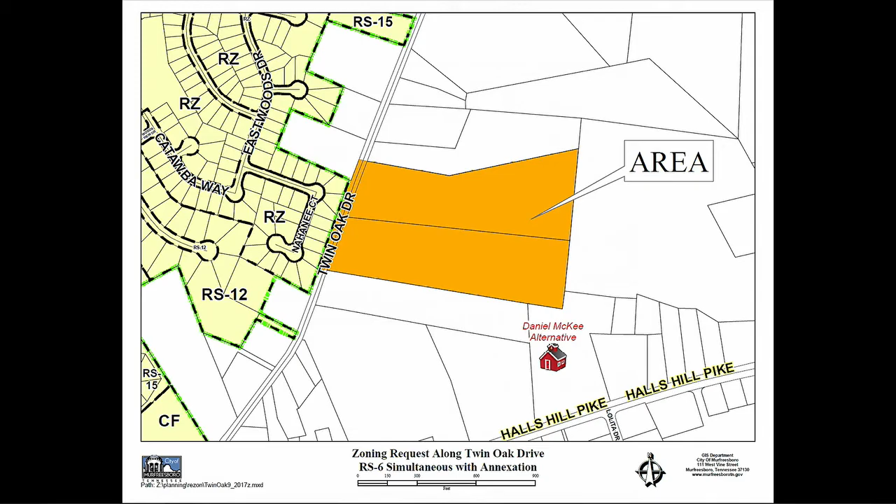Of course, immediately upon adopting the plan, we get a request for rezoning. So the commission and city council should consider whether that land use designation continues to be appropriate for this area and should consider how residential development on the subject property may impact the long-range plan. As with the annexation request, due to the lack of easements for the sewer extension, we would ask that you hold the public hearing but defer voting on this matter until the easements are secured.

Mark Lee with SEC is here, I think, along with some representatives from Habitat for Humanity, and can talk a little more about this request and about what the ultimate goal is with this rezoning, and staff can answer any questions that you may have. Okay. Mr. Lee?

It's going to be that very last icon down there on the bottom, Mark. Yeah, that one. There we go.

Thank you, Chairman Lamb, members of the commission. I'm Mark Lee with Site Engineering Consultants. We are the design engineers for this project, and the owner-developer will be Habitat for Humanity, the local affiliate. And we have with us tonight the director of the local affiliate, Ms. Terry Schultz, and also the superintendent, Mr. Roy Saylor. And also, we have with us Old South, who is helping lead Habitat through the development process. And we appreciate Mr. John Floyd and Mr. Dan Bobo for assisting Habitat.

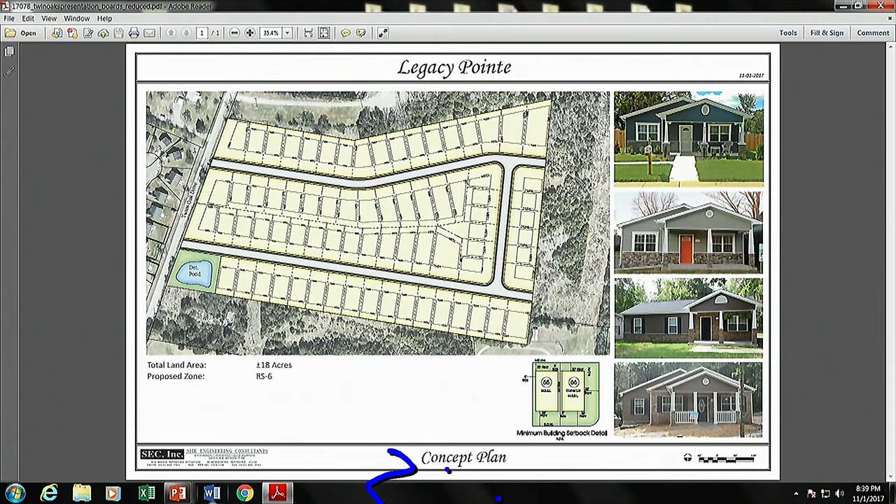The number of lots available through the year is not always sufficient and leaves qualified homeowners waiting longer for affordable housing or forced into a less desirable location. This subdivision will provide about 8 years of lot inventory solely used for Habitat's affordable housing. Further meeting the goals of the 2035 Comprehensive Plan, Legacy Pointe will provide stable, safe homes with an affordable mortgage in a livable, attractive neighborhood.

This project will provide an opportunity for families to purchase high-quality, affordable homes that are Energy Star certified. And finally, Legacy Pointe will have interconnected streets and sidewalks on each side of the roads, allowing walkability throughout the neighborhood. We concur with Mr. Anthony's request for a deferral. We will return after the required easements are acquired to finalize annexation and rezoning.

And we thank you for your time, and I'll be glad to answer any questions, or staff as well, or Habitat staff as well. Any questions from the Planning Commission for Mr. Lee? Mark, thank you very much. Thank you, Chairman Lamb. For your time. I'll open the public hearing. Ask anybody to come forward that would like to speak. Seeing nobody come forward, I'll close the public hearing.

We need a motion for deferral. I'll move to defer. Second. All in favor say aye. Aye. All opposed. Motion carries. That completes the public hearing portion of our agenda. Move on to staff reports and other business.